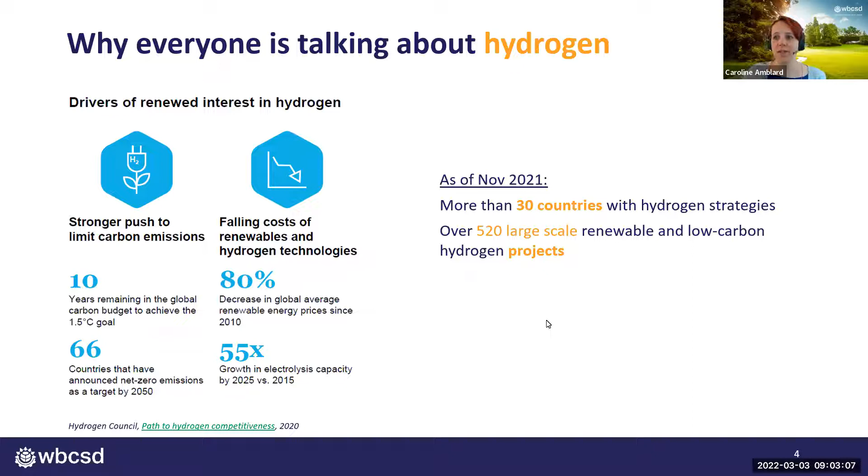And in fact, this graph here that I'm showing, I had two sides and I had to crop the right-hand side because it was so out of date already from 2 years ago. And I had to update it here to tell you that today, or at least as of the end of last year, there were more than 30 countries that had a hydrogen strategy and more than 500 large-scale projects that have been announced. So we're going to go into the details of that, and the people who are going to help you understand this topic today are Magnus, Molly, and Loic.

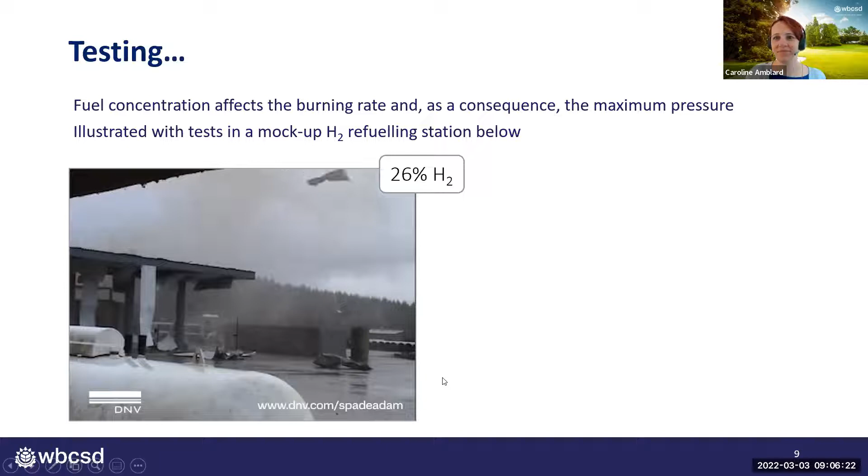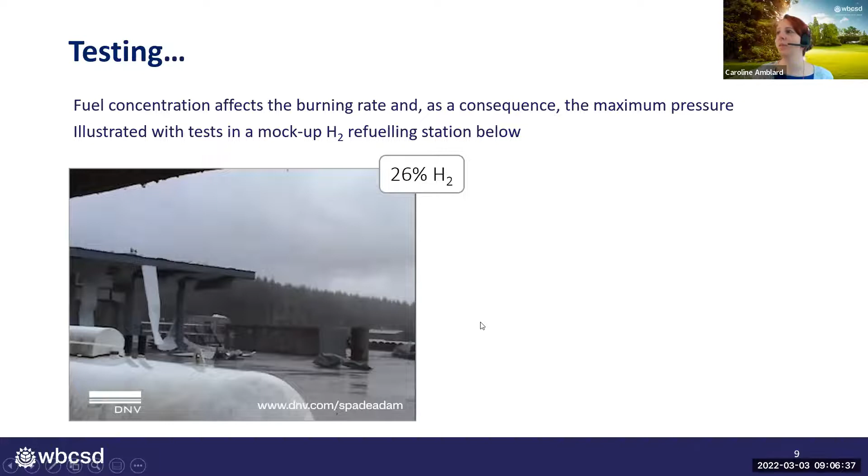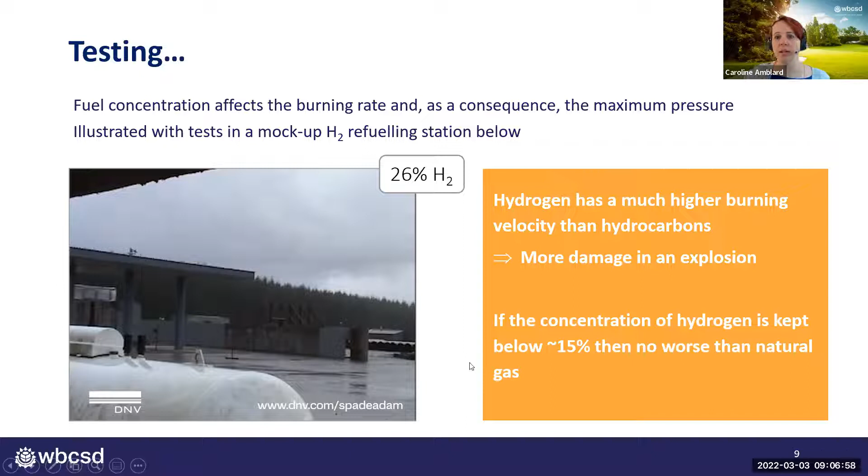There we go. So this was an explosion with a 26% mix of hydrogen. And oops, sorry, it started again. And so what you need to know is that at high concentrations like this, it has a much higher burning velocity than hydrocarbons, which means that essentially the damage from the explosion can be bigger. However, if the concentration is lower, it is similar to hydrocarbons.

But let's compare it with a molecule that most of us are fairly familiar with, which is methane, which is the gas that you may be cooking with. So methane, 1 atom of carbon, 4 atoms of hydrogen, and hydrogen is basically dihydrogen, actually, because it's 2 atoms of hydrogen tightly bound together.

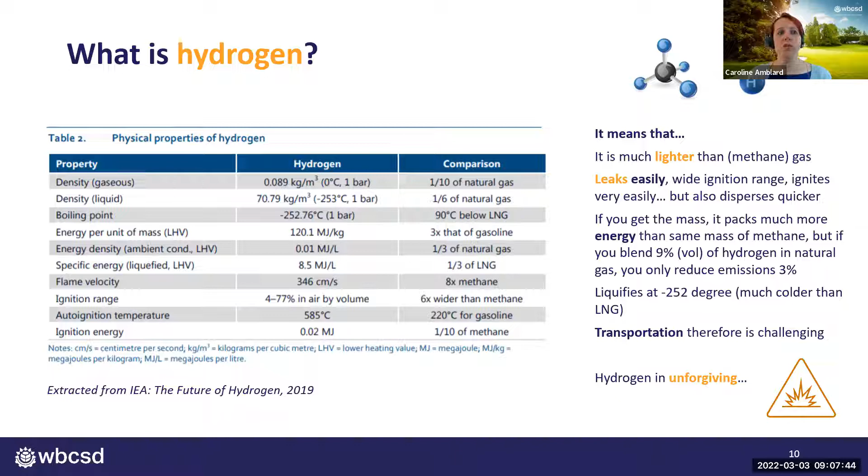So if we compare that with natural gas, what you need to know is that it's essentially a lot lighter. It's a smaller molecule, which means that it's going to leak a lot more easily. So when we talk about repurposing infrastructure, for example, it will be very important to check that basically it's possible. At the flanges in compressors and so on, we could have leaks that we're not seeing with methane.

It also has a much wider ignition range than methane, and it doesn't take a lot to ignite it. So that makes it a lot more dangerous in that way. And at the same time, to help balance that, thankfully, it also disperses a lot quicker, being so light.

If you get the mass, it packs a lot more energy than methane. The problem is that that mass takes a very large volume to achieve. So either you will have to compress it to very high pressures, or to liquefy it close to absolute zero, which means that that also takes a lot of energy and is not something that is that easy to do.

This also means that if you blend 9% of hydrogen in, say, a gas pipe, you will only get a 3% gain in emissions reduction, because that 9% of hydrogen only has the energy of 3% of methane, essentially. So all of this means that transportation in particular is challenging, and that it can be fairly unforgiving if you get the right circumstances for either a jet fire or even an explosion.

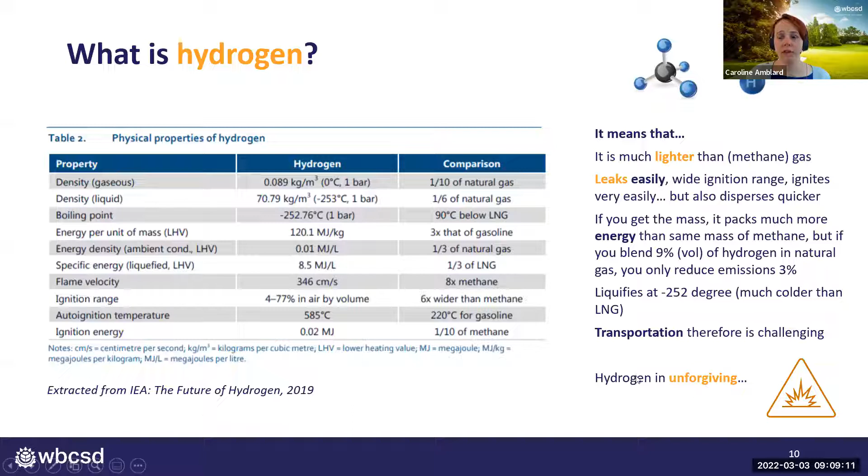Okay, so having said that, we are making quite a lot of hydrogen today, and we seem to be doing that safely, which is good news. So we do have the know-how. If we look at the production today, it mainly comes from a process called steam methane reforming in refineries, essentially, or chemical plants. That's what we call gray hydrogen, and it's nearly 75% of all the hydrogen today.

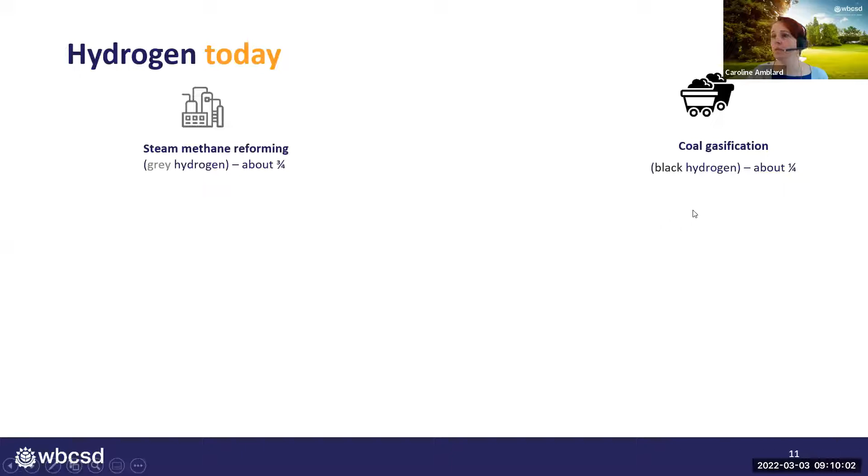The other source is from coal gasification, which we call black hydrogen. And we make about 80 million tons per annum of it on purpose, but it's also a byproduct of a number of chemical reactions, which means that there is also quite a large quantity that comes nearly for free as a byproduct of something else. Now, these numbers, you may have seen something different. It really depends on which report you base yourself on, and in which year; things are moving a little bit, of course.

Now, where it is used, it's used in 3 main ways. The first one, and really the main use today, is as feedstock for the chemical, refining, and fertilizer industry. So, for example, to make methanol, but also to make better fuels, and in the fertilizer industry to make ammonia. So that's how we use it today.

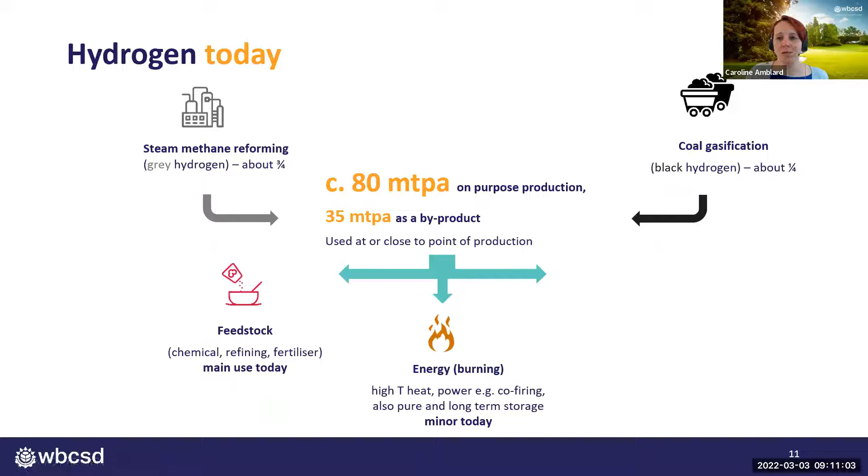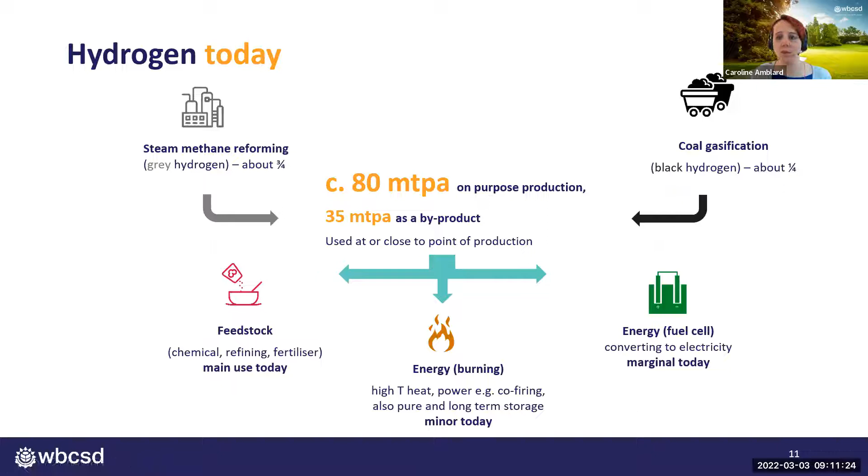You can also get a lot of energy from it, as we've seen, if you burn it, but that is quite a minor usage today. And then another way to use it is also as energy, but this time by converting it back to electricity in a fuel cell. And those are some of the applications that are likely to develop in the future, and Magnus will tell you more about that.

Now, you may have heard about blue hydrogen, green hydrogen, and be wondering what all those colors mean. So I'm going to talk you through that. And I also want to mention the carbon intensity of those various kinds of hydrogen. So I'm saying various kinds. Hydrogen is hydrogen. So you get the same product, maybe in slightly different purity levels. It's essentially the same molecule that you get in different ways.

And in terms of carbon intensity, we're looking at full life cycle. So that includes emissions from infrastructure, construction, decommissioning, etc., in addition to operation, of course. And we're going to talk here in kilograms of CO2 per kilogram of hydrogen.

Now, green hydrogen today is marginal. However, it is expected to be the main form of hydrogen in 2050.

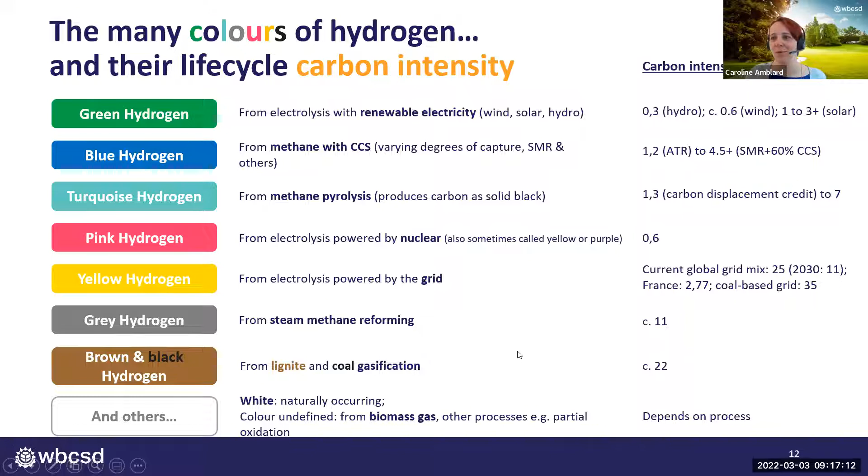So I hope, in a nutshell, that I've demystified all the colors of hydrogen and that it's been helpful. I've explained where hydrogen is at today, and now I'm going to hand over to Magnus, who's going to tell us all about where hydrogen could be and what it could be used for in 2050. Yes, thank you, Caroline, for the introduction.

As you mentioned, hydrogen production and consumption today is about 115 million tons per year globally. But the question going forward is how much can it scale and how fast can it scale? What role can hydrogen take for decarbonization in various sectors? And there are several estimates on future volumes, both forecasts with business as usual and scenarios for reaching a net zero future. You have, for instance, IEA, the Hydrogen Council, Bloomberg, but also countries and regions like the EU with different strategies and estimates. And we also do it in DNV.

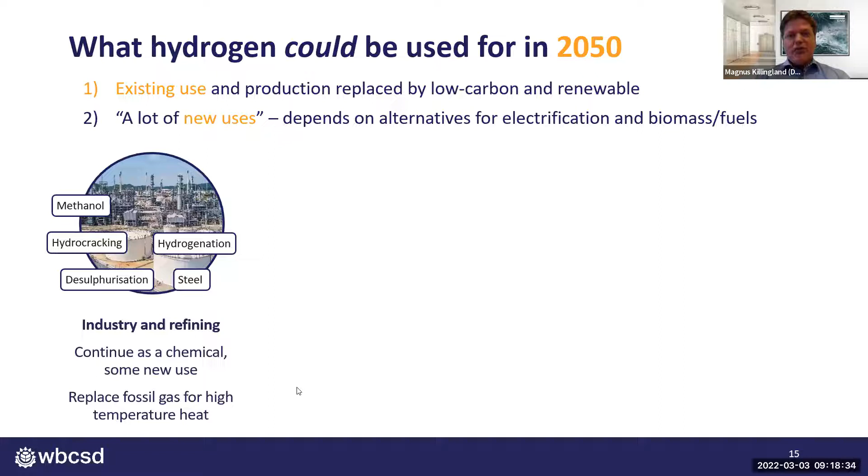In the next slide, you will see that there are kind of two main dimensions to scaling up. And that is decarbonization of the existing use, the gray hydrogen, which is used in refineries and industry. But also it's all about scaling up the new use and offtake. So in industry and refining, it's mainly about decarbonization, replacing the gray hydrogen with blue and green.

This industry sector is characterized with large volumes. They usually have captive customers. So it's likely that blue hydrogen will play a role with low purity and lower cost. But some subsectors like steel will create new demand.

Hydrogen carriers such as ammonia are both important for decarbonization of existing ammonia and fertilizer value chains as a global commodity, but also new use for ammonia and hydrogen carriers such as fuels for the maritime sector. For instance, for deep sea shipping across large seas and between continents.

New hydrogen offtake is most needed where electrification and biofuels are not possible, and that is mainly for long distance and heavy duty transport. So what is the quickest way to decarbonize these sectors? Some claim it is to reuse existing infrastructure and make synthetic hydrocarbons, so-called drop-in fuels, with the same physical properties as existing aviation fuel or gasolines.

A lot of hydrogen is then needed, especially if e-fuels are to be produced by making synthesis gases and combining hydrogen with CO2. That has its own challenges, but also many opportunities on reusing existing infrastructure and reducing costs. But if you're going to make e-fuels, then you also need CO2, and preferably biogenic or atmospheric, to keep the carbon footprint low.

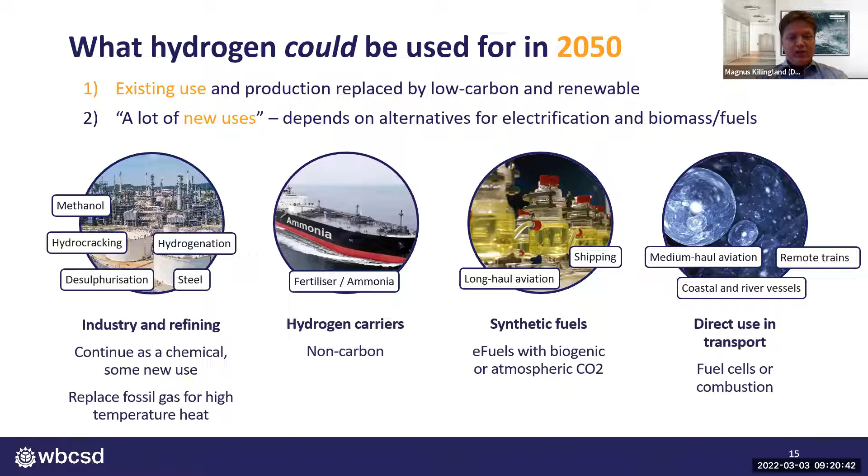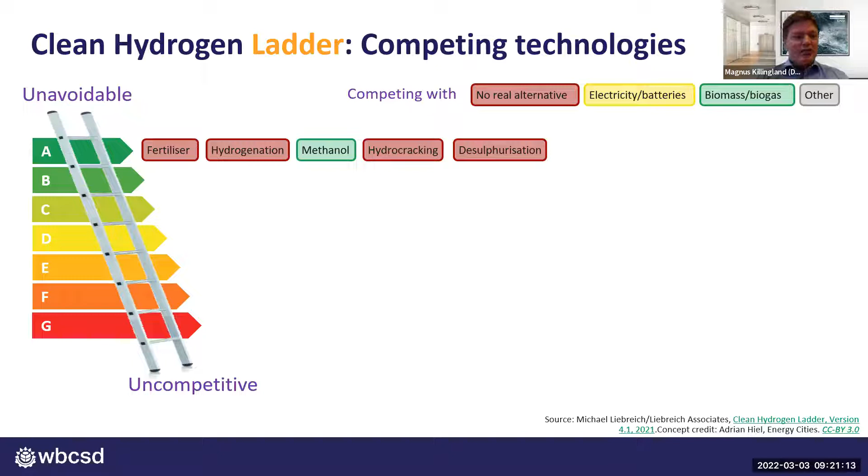So on the next slide, we can dive more into what sectors are most relevant for hydrogen and look at competing technologies. So here we can have a look at a so-called hydrogen ladder, which defines which sectors are most relevant at the top, and less competitive or uncompetitive at the bottom. So as I mentioned in previous slides, some of these sectors that use hydrogen today really cannot do electrification and have to continue using hydrogen, but then cleaner hydrogen.

So for each sector, there will be some new hydrogen use, but the green boxes show where, for instance, biogas and biofuels may provide most of the energy input, and the yellow shows where electrification may play a larger part and compete with the uptake of hydrogen.

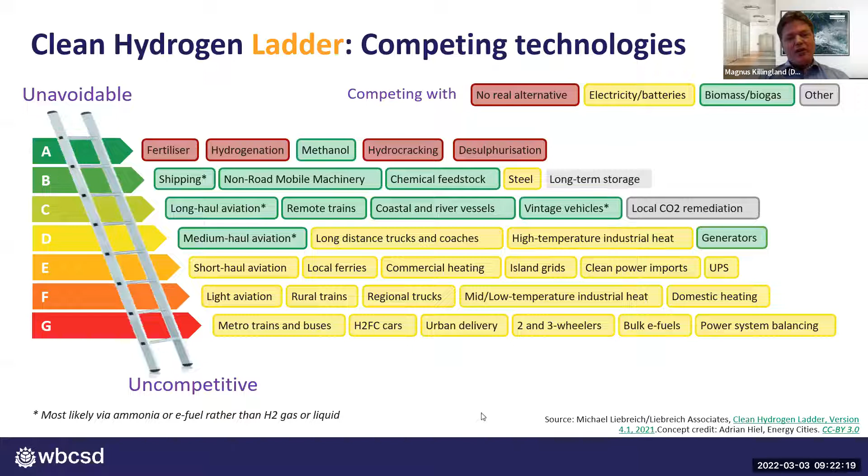When it comes to biomass and biogas, personally, I believe that we do not have enough sustainable biomass or biogas. So some of these green boxes may be red, like for instance, shipping, long-haul aviation, and some of these hard-to-abate sectors. So how fast hydrogen scales depends on these competing technologies, based again on regulatory frameworks and industry initiatives. So this you can have a look at later, and we can also of course discuss which sectors we think will have a larger or less uptake of hydrogen.

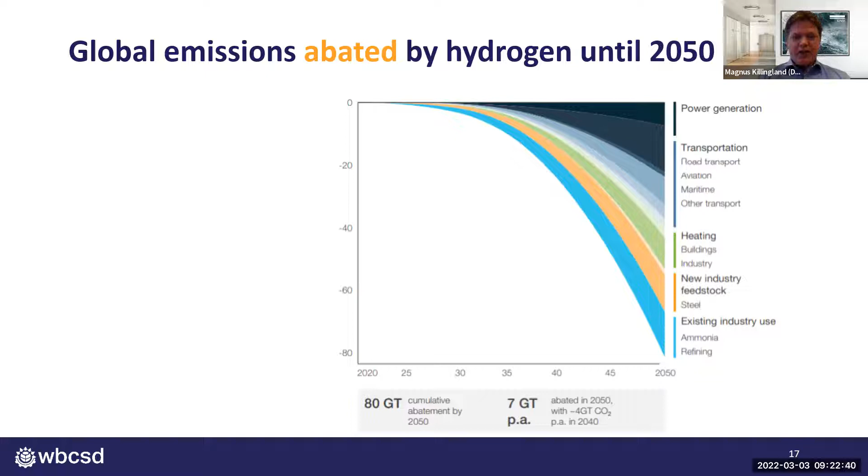So hydrogen may play a large or a smaller role for decarbonization in the world. Here we see one scenario on how much hydrogen may play a part. This is from the Hydrogen Council scenario. And one possibility is then that clean hydrogen can be a solution for 1/5 of our remaining carbon budget. This depends, of course, on how fast it scales up.

So we have about 400 gigatons of emissions left on our carbon budget if we want to not go above 1.5 degrees. That is happening within 10 to 15 years. And if we manage to scale hydrogen fast and safe, hydrogen can be one important tool for decarbonization, together with a lot of other measures.

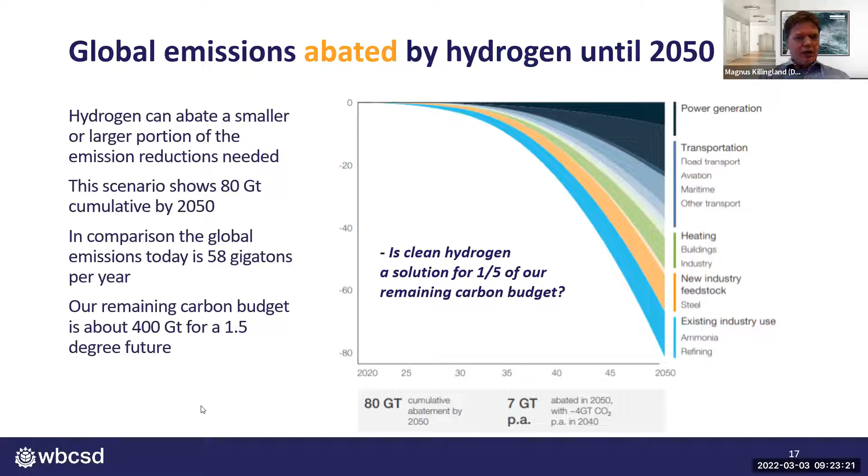An electrolyzer can be built within a few months, so the production scale up is easier than new offtake. For instance, a green steel mill or fertilizer plant may take years to construct. So it really depends on the demand side, how fast that scales.

So most of these projects focus on low carbon hydrogen, on renewable hydrogen, below, for instance, 3 to 4 kilos or even lower, to meet those criteria. We see now that China, Europe, the US, and other countries have limits for CO2 intensity and what's allowed to be called low carbon or renewable hydrogen. And then my final slide shows that a lot of investment is needed.

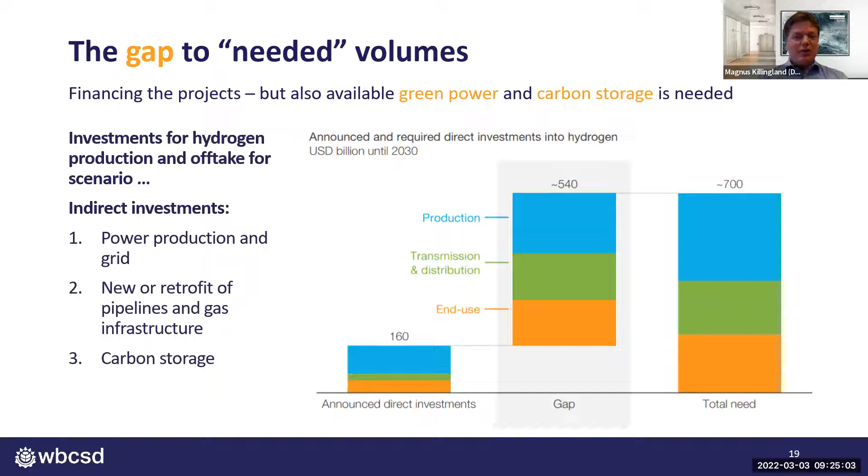There is a lot of announced direct investments, but much more is needed if you're going to reach these ambitious emissions targets. Now I'll give the word to Molly Iliffe that will look more into what is needed.

Thanks. Thanks very much, Magnus. It's great. Hi, everyone. Okay, so Magnus has explained to you the kind of exciting future, how we might see hydrogen develop. What I'm going to talk to you about is what are some of the barriers that we need to overcome in order to get there, and what are some of the enablers to overcome these. And I'll also explain to you a potential pathway that we might see in terms of the development of the hydrogen economy over time as we gradually overcome these barriers, and a couple of sectors that might be quite critical to achieving those goals.

And I'm going to do it all in 15 minutes, so we'll see how it goes. It's a lot to cram in.

The first couple of slides give an overview of some of the key barriers and enablers for the large-scale uptake of low-carbon hydrogen, by which we're including basically anything that isn't grey, so green, blue, pink hydrogen, the different colours that Caroline explained earlier.

So firstly, the first critical barrier, which receives a lot of attention, and rightly so, is around production costs associated with low carbon hydrogen. So it's no secret that it's much more expensive to produce low carbon hydrogen than it is to use conventional fuels that exist at the moment. And although we can see that significant cost reductions are likely to develop over time, there's a lot of uncertainty around when those cost reductions will be realized.

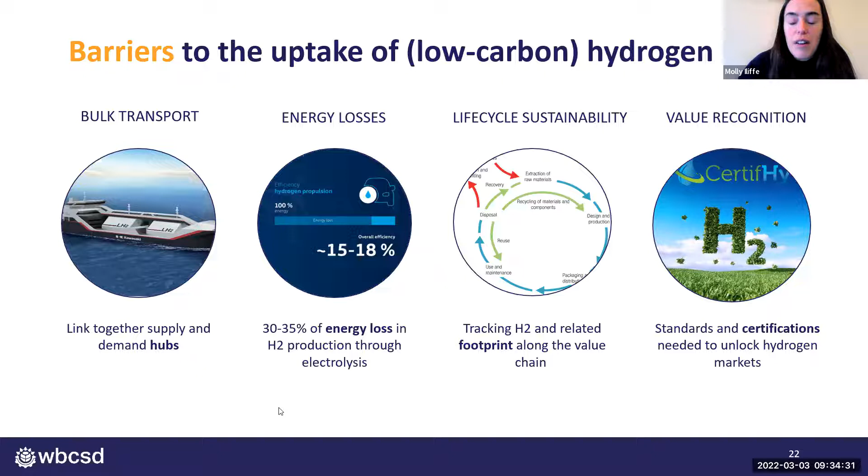And that links with this last sort of value and enabler, which is value recognition. So in order for low carbon hydrogen to be able to attract the premium that it will need in the market compared to grey hydrogen, because it has higher costs, there'll need to be an effective system for it to be certified and for it to be able to capture that from off-takers. And that will enable us to move forward with this market globally at scale. So that's a quick overview of some of the barriers and enablers.

So a quick deep dive over the next couple of slides into costs, because this is a critical issue and something that a lot of people are very mindful of at the moment. So I've broadly characterized some of the drivers around bringing down hydrogen costs over time in three key areas here. So the first one is really around technology, the second one is around production, and the third one is around financing availability.

So first of all, around technology, we've made a lot of progress over the last few years, but looking forward, we expect a lot more progress to be made across the whole hydrogen value chain in order to develop technology, improve performance, and reduce costs. We're seeing key equipment manufacturers move to bulk production at scale in serialized manufacture, and that's having a massive impact on costs of things like electrolyzers. But there's a lot more that still needs to be done.

There's also potential to optimize business models, and this is reflected in the focus on hydrogen valleys and islands, so that projects can share infrastructure between each other and reduce costs, and also capture synergies, for example, by using waste heat or byproducts of industrial processes as part of the production of hydrogen carriers or the conversion back to hydrogen. So that's a couple of important areas that can be used to bring down costs going forward.

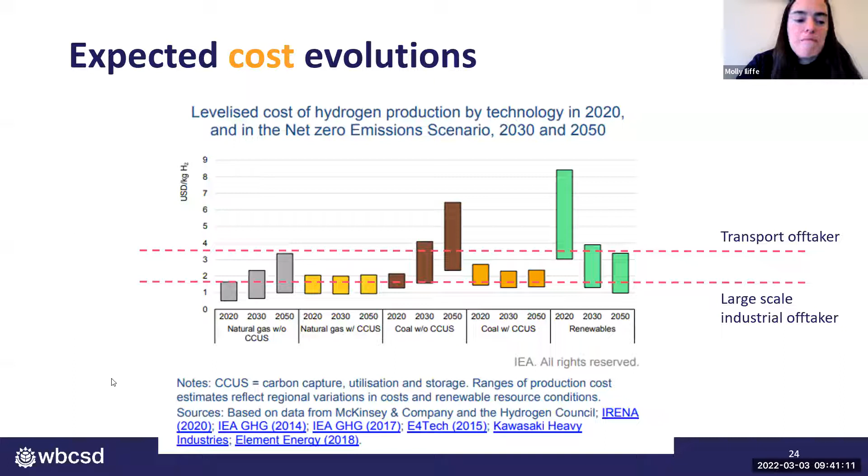Okay, so bearing all of this in mind, those key drivers, the barriers and enablers that we've discussed, how might we see the hydrogen economy develop over the next decade and as we look out to 2050 and the global aspirations that have been articulated by many countries with regards to reaching net zero? So it's likely that for the first half of this decade, we'll see a range of small-scale demonstrator projects with a lot of learnings associated with them. A lot of laying the groundwork in terms of developing regulations, filling out the policy detail associated with hydrogen, and early mover projects which have anchor off-takers, enabling them to move forward. We're also seeing OEMs invest heavily in R&D.

Then towards the end of this decade, we're likely to see the first commercial projects start to come online, generally clustered around hydrogen valleys and islands in order to achieve synergies and share infrastructure and enable them to achieve cost savings associated with that. We'll see rapid scaling of the industry, significant cost reductions associated with moving to scale, the move to serialized manufacturing that I discussed earlier, and technology improvements. It's likely that there'll be a transitional role for blue, particularly over the next couple of decades, as a market maker, because it will take quite a long time for green hydrogen to be able to scale up to meet demand, and also for the costs associated with green hydrogen to reduce, as we saw in the previous slide.

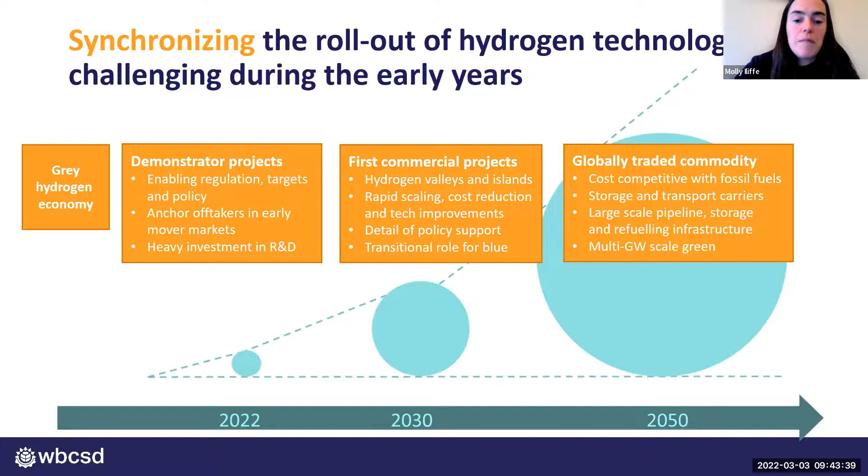But the downside is the relative price sensitivity, particularly while externalities such as carbon pricing aren't creating a significant impact to improve the cost competitiveness of low carbon hydrogen. Industrial clusters, it's likely that they will provide anchor demand from which the hydrogen economy can grow.

So what we may see is that these two sectors, to enable the early stage development of the hydrogen economy, will have anchor industrial clusters in hydrogen valley type setups, and then hydrogen valleys will grow through transport corridors in order to link together. And from that, we'll see the development and the growth of a broader hydrogen economy.

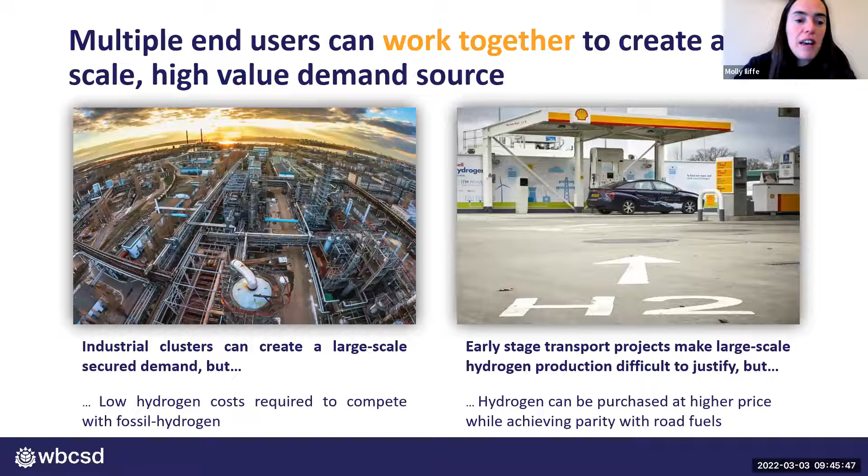So I hope that that's been interesting. I'll pass back to you, Caroline, for the sum up. Thank you, Molly. It was very interesting.

Thanks a lot. So if I try to summarize, why is hydrogen important and why are we talking about it right now? First of all, large decarbonization potential. Of course, it will depend on what kind of hydrogen you're making and what its carbon intensity is. But as we've seen, it can be used in a lot of different applications. Some of them have no other options really to get to net zero, and it could be a significant part of the energy demand in 2050.

Having said that, it's important that hydrogen is seen not as the wonder molecule that's going to solve everything, but more as one of the tools in the toolbox, and it's important that we follow optimal decarbonization pathways. There will be applications in which it will be more efficient or more cost effective to use electrification, for example, and that is also important to know.

And to make all of this happen, it requires a lot of things to develop in parallel, from the various technologies, which are mature, but improvements are still possible, to policy, regulation, standards, as we've seen, the financing, and also that critically important point of matching demand and supply.

So with this, I'm going to hand over to Loic, who is going to moderate the questions for us. Loic, what do you have in store for the presenters? Thanks very much, all of you, for the presentation. Yeah, we have very different questions.